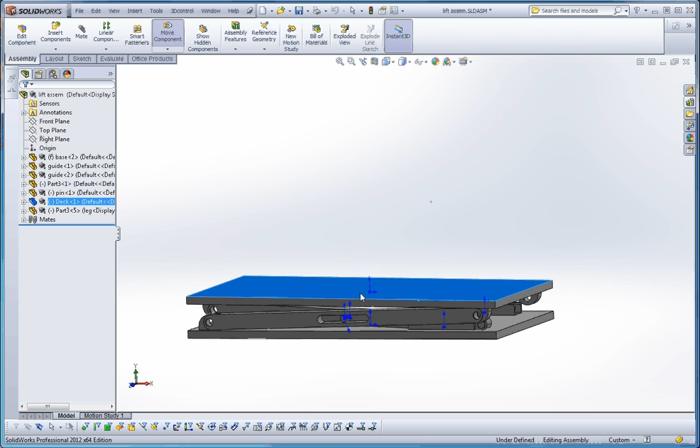One thing that's apparent about the assembly is that when you lift it up, it has a tendency to rotate. In fact, it really exaggerates that toward the end, so it isn't quite parallel. I believe the way you solve that is if you think about this as being mirrored both top and bottom, what you need down here is a slide as you have, a fixed rotation point over here, and a slide up here.

What you have is a slide right here, and I believe that slide needs to be on top, so whatever happens on the top happens on the bottom and vice versa. I think that will make things function a little bit better.

So let's do this. Let's start from the bottom of the bar, go to the top, and check our parts and see how they work.

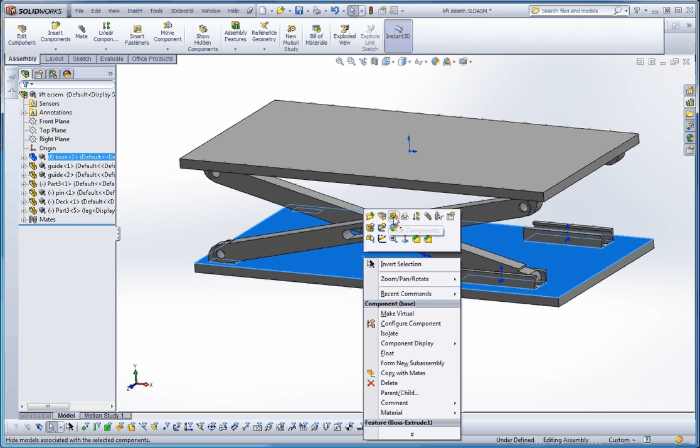What I like to do is open these up, and you can do this one of two ways. You can click on the part itself, right click, and go to your choices, but typically the most common choices are in the upper left-hand corner. You could open a part, edit the part in place into the assembly, hide components, change transparency, and so on. But what we're looking for is open part. We can do the same thing over here on the feature manager design tree—open up the part that way too.

So let's go ahead and look at the base. What I typically do is open these up, look at your sketches, and make sure your sketch is fully defined. You have one that's not fully defined down here, but just for fun, let's start with the top sketch and take a look at that. That looks like a really good start.

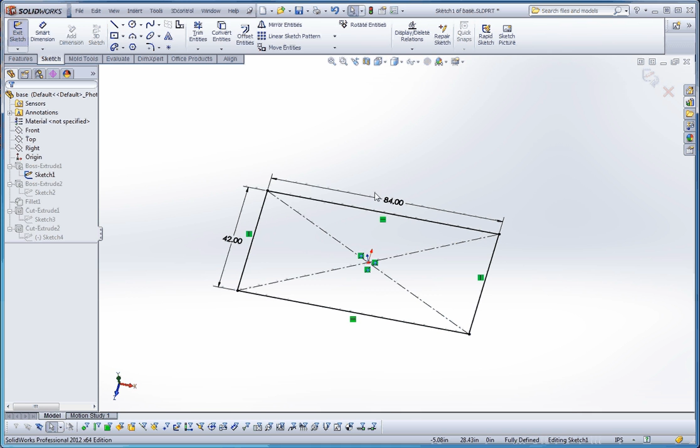When you're putting your sketches together like this, you also want to make sure you don't have any crowding issues, because when you insert these into a drawing format, the dimensions the way you have them right now is the way they're going to appear in the drawing. So you want to make sure they look good—you have good symmetry in there.

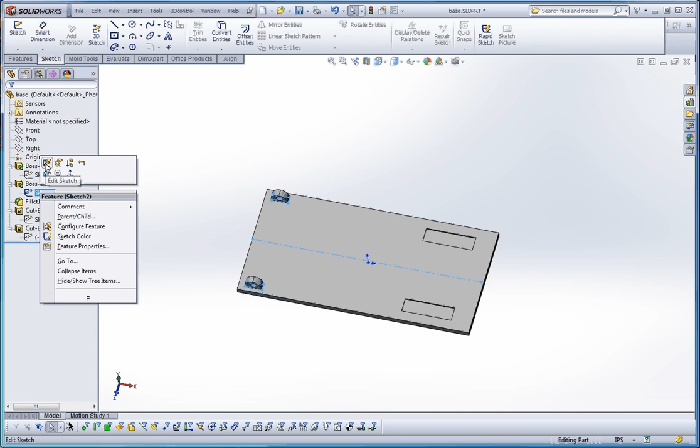You have the origin right in the middle of that, which is exactly where you want it to be. So now you have your planes in the middle of that too—your top plane is there, of course, but your front and right plane are also right down the middle, as you can see. This one looks good. What you do is fully define it on one side and just mirror it to the other side. That's perfect, exactly what you want.

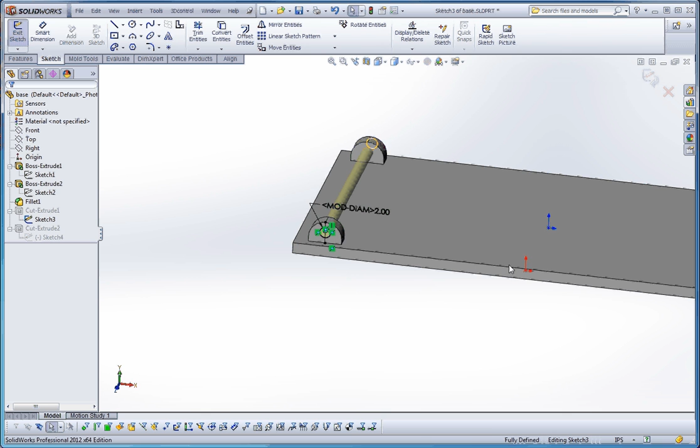Then you have your projected origin down here, turning blue. What I typically do when I go through sketches like this is look for blue elements—things that may not be fully defined. That also means your real origin is that way too, so that's your origin, that's where the origin really is. But the projected origin for your sketching is actually right there. So that looks like it's fully defined and in a good location.

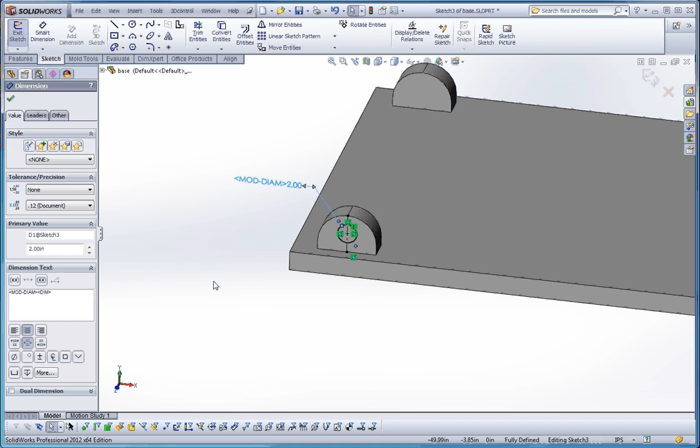For some reason, the text you have down here regarding the definition of your diameter is actually showing the text. Sometimes that happens when the capacity of your computer, like your memory, is getting really low, and it just pops up every now and then. If you were to redo that dimension, it might change it. So that looks pretty good.

And then this cut extrude down here—you don't necessarily have to, but it's good practice to go ahead and redefine these. You have some elements down here that aren't fully defined.

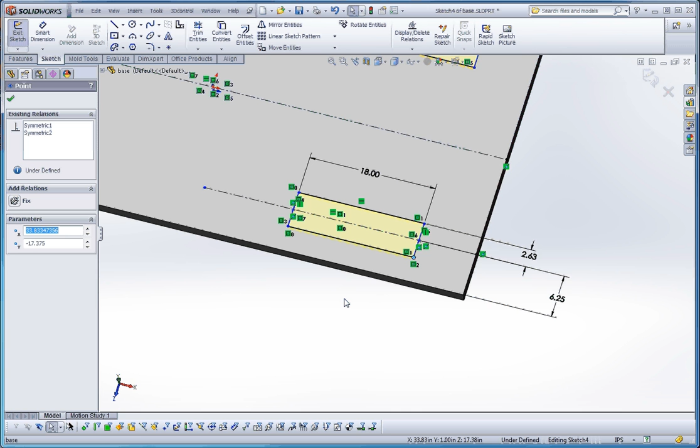So what we have down here is these lines aren't fully defined. The way you typically do this is grab some of the points and pull them back and forth. You can pull the line, but it's better to grab the points, because that will tell you more—whether this line and that line are not fully defined, and you can go ahead and define that. So it looks like what you need is a distance relationship here between that line and the edge. Let's go ahead and put that in.

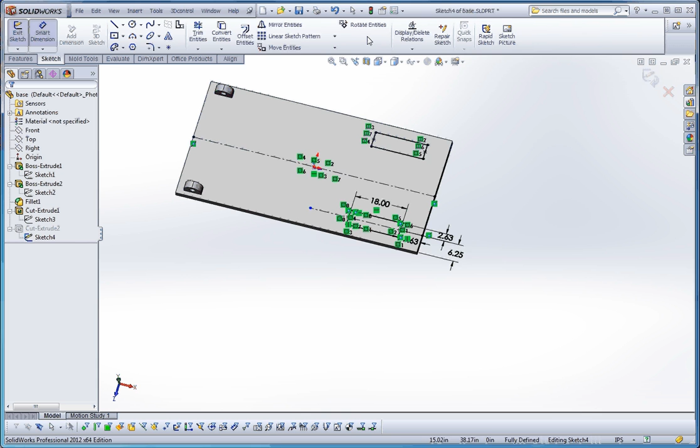7.625 perhaps. I'm not certain if that was the original placement of that. I thought it was 7.725, but let's go ahead and rebuild that, and now you can see your sketch is fully defined. So that's in pretty good shape.

I'm not going to save that, but I am going to keep the changes. So I didn't save it, didn't put it on my hard drive, but it will keep it in memory. And then now we're going to go ahead and take a look at the elements as they exist right now in your assembly. So let's go ahead and open up the next component that's going up.

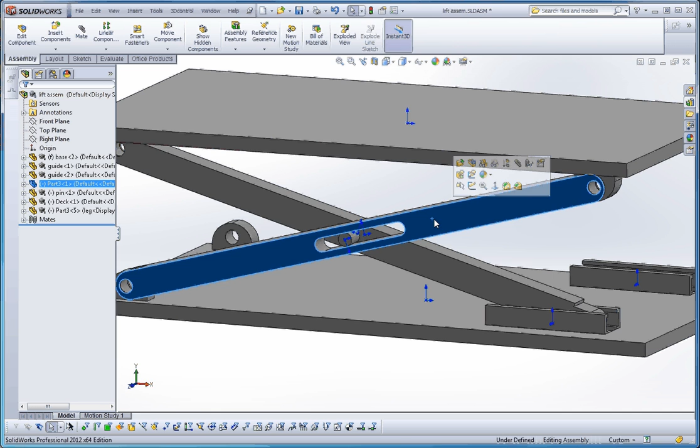Let's open up that. It looks like everything's fully defined, so that's in pretty good shape. It looks like you've done a lot of work here. And I also notice that you have some configurations in here too.

You have your default configuration, which you can keep. We can call this like maybe leg 1 or leg translation or whatever you want to do. And then you can have a leg 2 in there too. Think about the default configuration.

I usually have a default configuration in there that's got all the elements turned on, so you can see everything and how they relate to each other. But the way it is right now, it looks like it's in pretty good shape. So I like that. Looks like that's pretty good.

Let's go ahead and open these up, see if there's any sketches that need to be defined a little bit better. It looks like you have all these pretty well defined, so this is a very good model so far. And yeah, it's in pretty good shape.

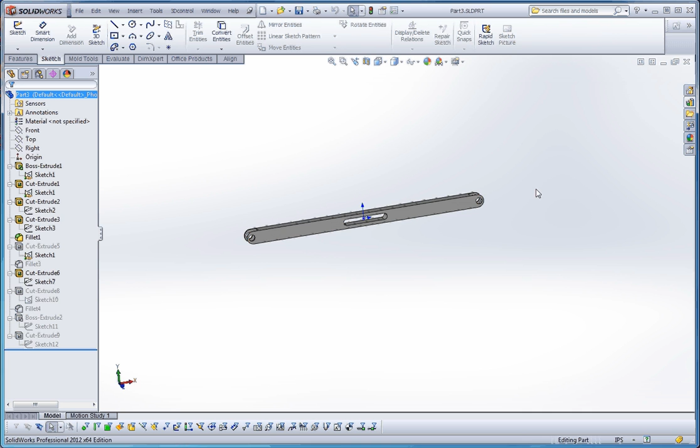So that leg and that leg we've covered. I don't think we've covered this, so let's go ahead and open up that and see what that looks like. You have a boss extrude, and that looks like it's underdefined.

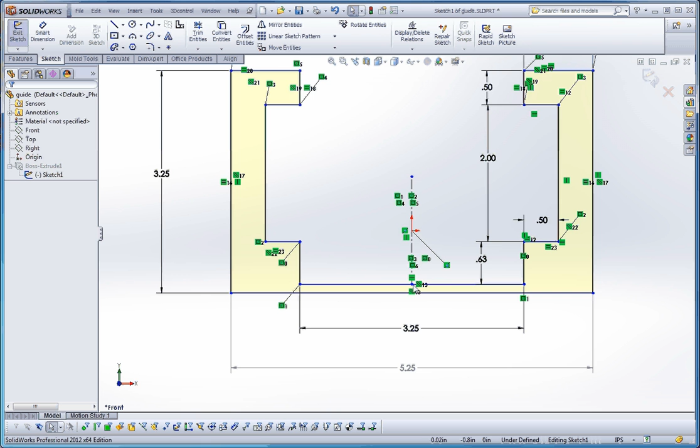And yeah, I'm going to make that normal too. I have a shortcut key for that. So it looks like your origin is out here, maybe in an arbitrary position here. Let's go ahead and put your origin in a different spot.

What I'm going to do is take your center line here and trim that a little bit. I'm also going to take the midpoint of this line and make that coincident with that center line. I did this because I want to make sure I put the origin down here on the bottom, so you have a midpoint down here. Let's go ahead and delete that midpoint sketch relation.

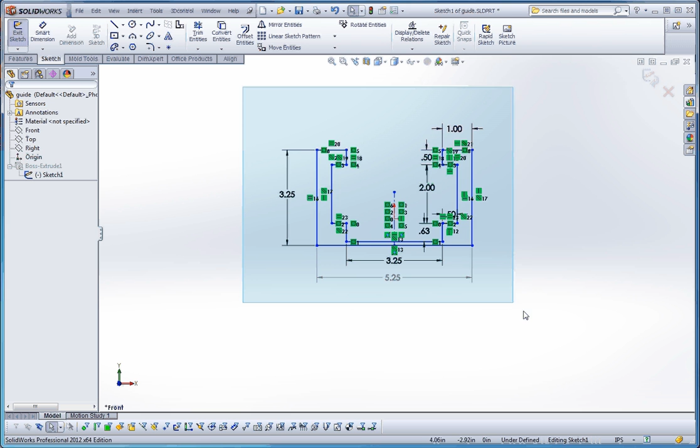And let's go ahead and grab everything and move that. So if you do a pickbox window around the whole thing, right click, go to move entities. Let's go ahead and pick this point here and move that up close to the origin. It's not going to give us that sketch relation up here.

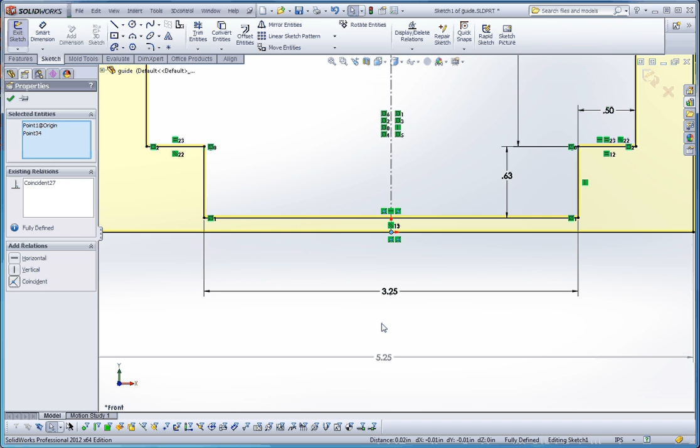So let's do this. Let's get it kind of close. And then after that, let's click on that and the origin to make those coincident with each other. And that should make it fully black. So everything's black, everything's fully defined.

We go ahead and rebuild that. The sketch is fully defined now. So it looks like we're in pretty good shape on that.

So let's go ahead and close that out. And I'm not going to save the changes, but again, I'm going to keep the changes in memory so that it updates our model, because I don't want to rewrite the files that you sent me.

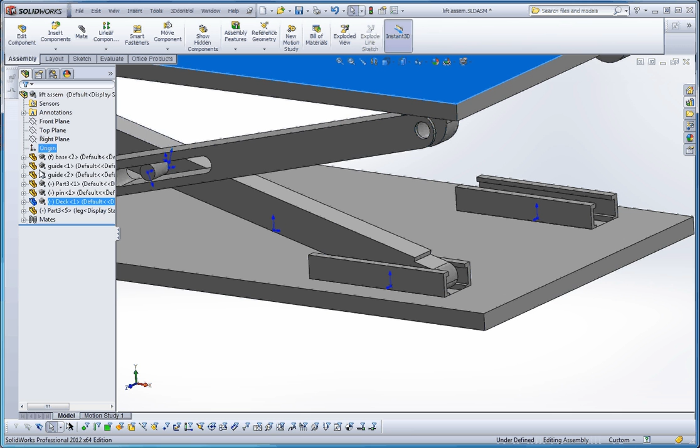So looks like everything's in pretty good shape. Let's go ahead and go through your mates and see what that looks like. You have a coincident mate down here, coincident mate on this side so that you line that up, and probably a third coincident mate in the back, which makes that fully defined in the assembly.

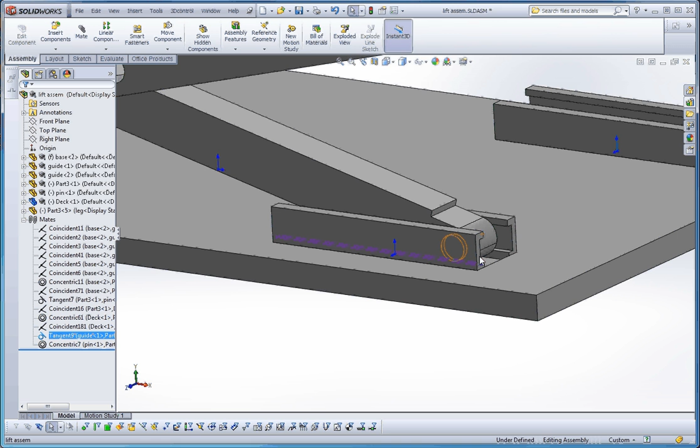It looks like we did the same thing on that side, so that's in pretty good shape. Concentric relationship there, coincident relationship, that lines that up. You have a tangent relationship here, that's okay. Coincident and concentric up there, coincident there, and tangent here, which is good, so that thing rolls along the bottom. And then you have a concentric up here, so that looks like it works.

So it looks like everything's in pretty good shape here. Your base on top, your deck, as you call it. Base would be the bottom, deck is on the top, and that's appropriately named. You could also have done this in configuration too.

You could have made the deck and the base the same file if you wanted to, and made a different configuration out of that. That's your option, you don't necessarily have to do that. But let's go back to our sketches here and see what that looks like.

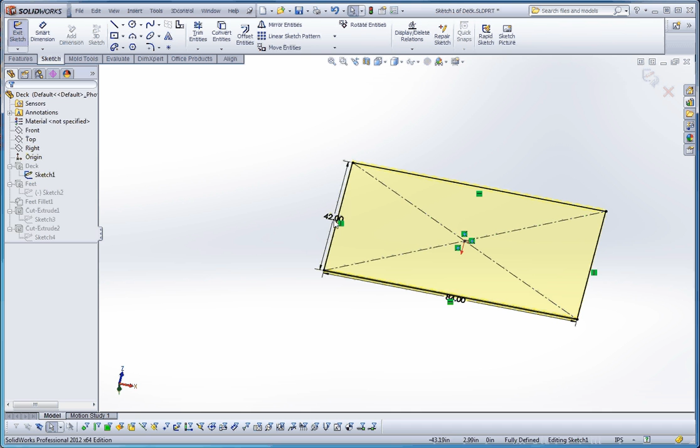The deck sketch here, which is the same dimensions as the base, that looks like it's in pretty good shape. The feet, that's not fully defined. The sketches for putting a hole in there is fully defined, and same with that side too, so that's in pretty good shape.

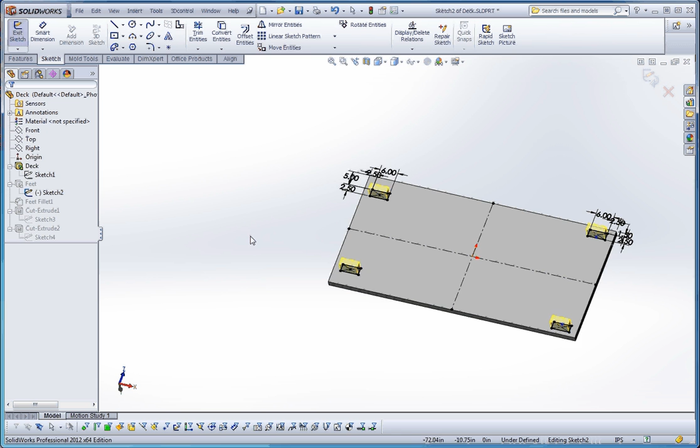One thing you can do about this too is you can mirror these elements on the other side, and I'll show you how to do that here in just a moment. But your feet, this is pretty good. Looks like it's not fully defined though.

And what I found in here were these wayward points. It looks like you had some points, maybe the points were in the middle, as they are in here, of your center rectangle that you made, and somehow they lost those relationships, but you don't really need them here, so let's go ahead and delete them.

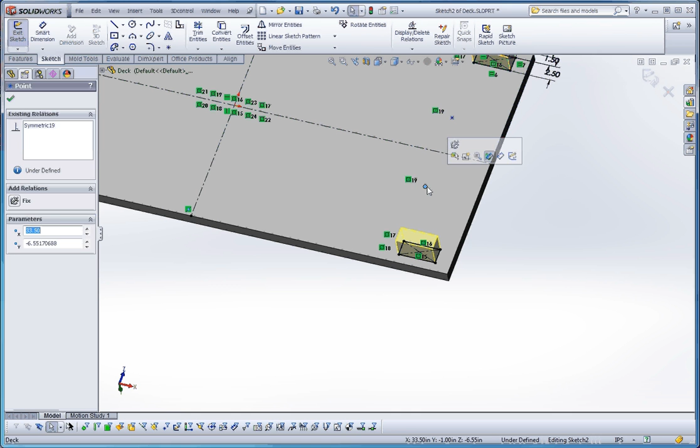And what I was looking for here is anything in blue. Anything in blue is probably going to be not fully defined. Something else you could do here too.

You went ahead and put in dimensions in here. As I mentioned before, when you put your dimensions in here, they are going to appear on a drawing. You don't necessarily want to have them appear twice. If these are symmetric with each other, you can go ahead and delete these relations or elements over here and just mirror everything.

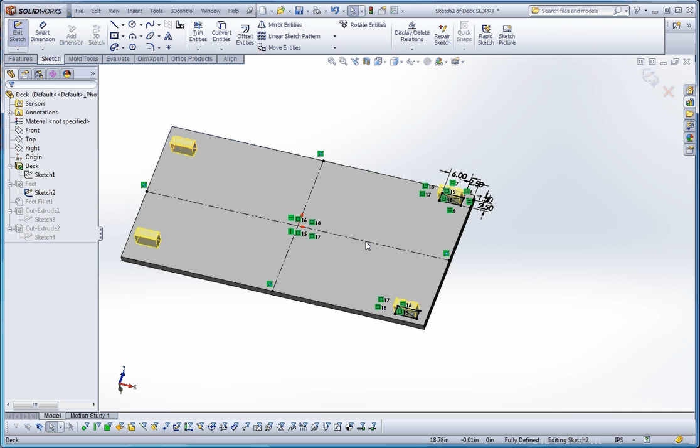So it looks like you initially mirrored these from this side to that side, which is good, using that center line as an element to mirror by. But let's do this. Let's go ahead and highlight these and go to the mirror command up here on your sketch tab on your command manager, and let's mirror about that.

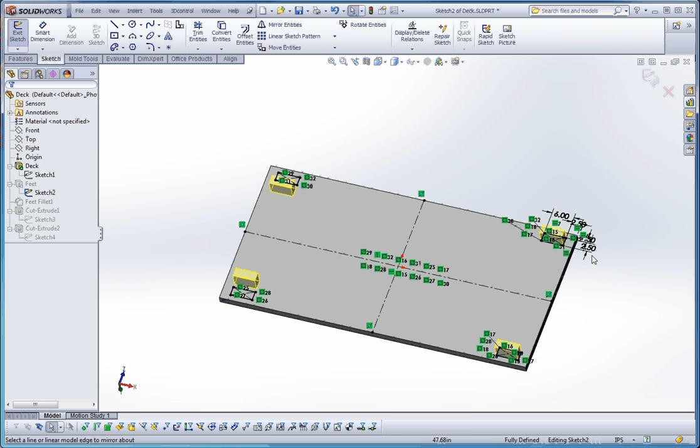So you should see them on this side over here. And if you do that, green check mark, now you have them over here. Now you have only one set of dimensions over here, mirrored to the bottom, and then these two elements mirrored over here. That should be in pretty good shape.

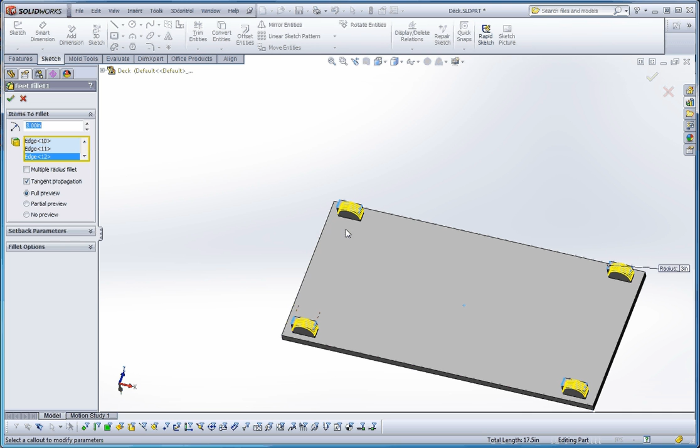Now that might cause other things to go out of reference here, but we can go ahead and fix that. So we have a missing edge over here, missing edge over here. What we want to do is put those edges in over here, and then add these edges over here, so we can redefine it. Just because there are now different features over here, it doesn't recognize what was there before.

So we have a couple missing edges over here. Let's go ahead and delete those because I think we've fully defined that. Now our orange or yellowish box turns blue. So I think we're in pretty good shape there.

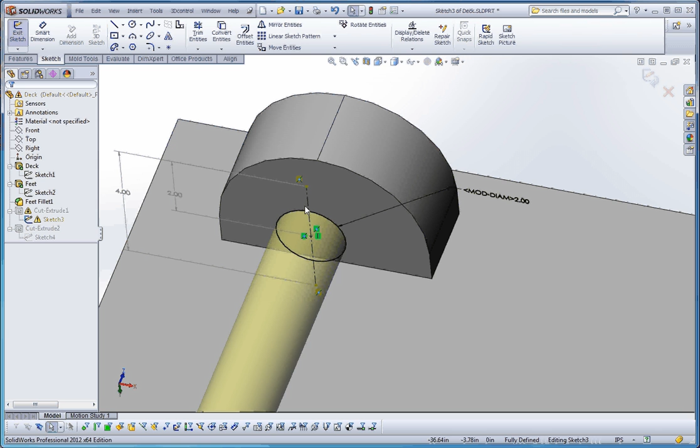The sketch is out of context over here, so let's go ahead and fix that. You have a sketch relation over here that's no longer valid. A couple things we can do. We can grab that endpoint since it turns red and try to align that up here. So we have that in good shape.

This one down here, when it turns red, we can go ahead and drag it and bring that over here. So that looks like it fully defined it. Let's go ahead and rebuild that.

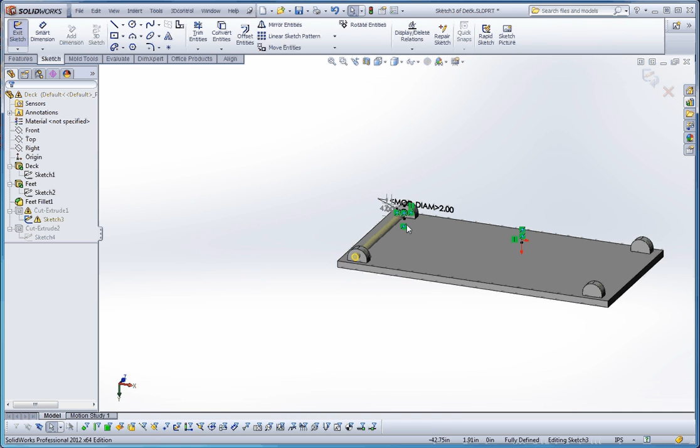It looks like we have some other elements in here too that are a little bit out of context. I think it's probably thinking about the plane that it should be drawn on. So if you right click on Sketch 3, go to Edit Sketch Plane, yeah, now that's missing a face. So I'm not certain what face you started on. I think it might have been this face perhaps, or maybe that face. Let's go ahead and try that and see if that works.

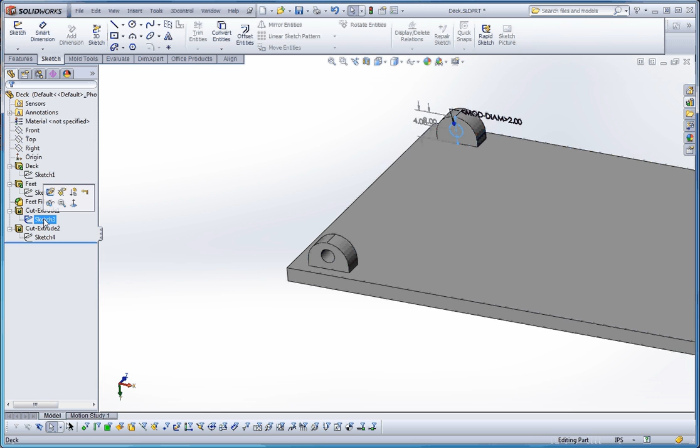If I didn't get the right face, and maybe it was on the other side, we can go ahead and redo that. Let's go ahead and choose this face. And then green check mark. Now it goes all the way through and that's in pretty good shape.

So everything else falls into line. Let's go ahead and rebuild that. Let's go ahead and close it. No, we're not going to save it, but yes, we want to keep it in memory. So that updates our model.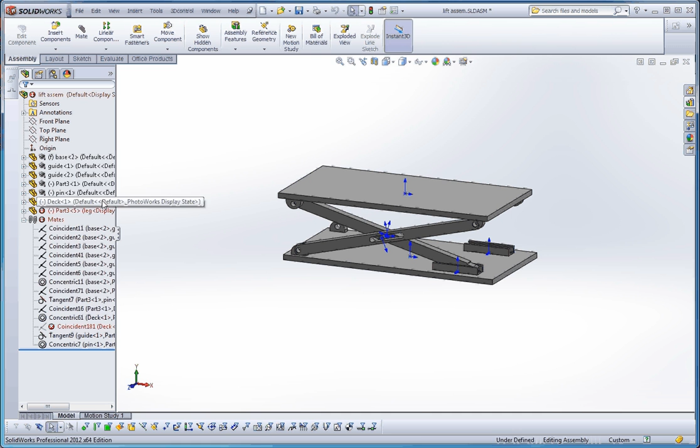And now we're in pretty good shape. So, you know, that caused some errors in here too. So let's go ahead and correct that. The coincident relationship in here, since that's a different feature in here, let's go ahead and redefine that.

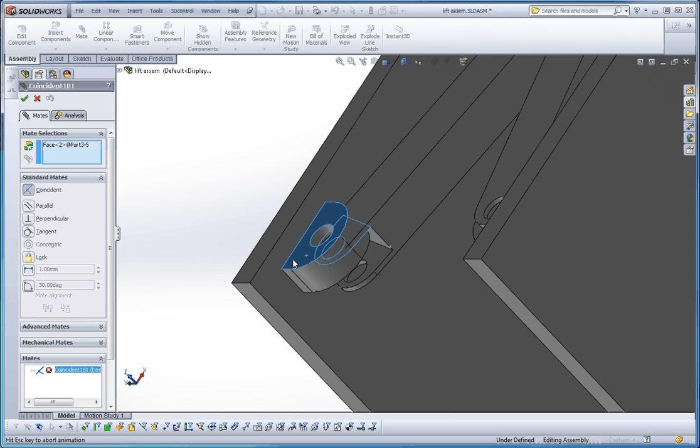So let's click on that. We're missing a face over here. And I think what it's looking for is this face here. So let's go ahead and click on that. Green check mark. And let's go ahead and rebuild. And that looks like the only error.

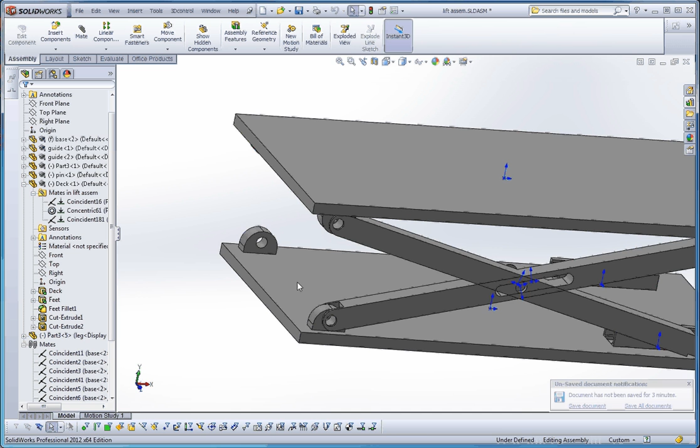So remember, when you redefine things in a sketch environment, it gives you a new feature. The new feature, if you go into the assembly environment, that feature also needs to be redefined for the faces and other things that might be in there that might need to be redefined there, if that makes sense.

So yes, I would redefine this so that it's— oops, looks like we're not quite in good shape there in the bottom. So we'll have to redefine some of these edges over here, but I'm not going to do that. Be careful when you do make redefinitions in here, and maybe that, you know, having those redundant dimensions in there on that one part, the deck part—you can probably keep that, and that's okay.

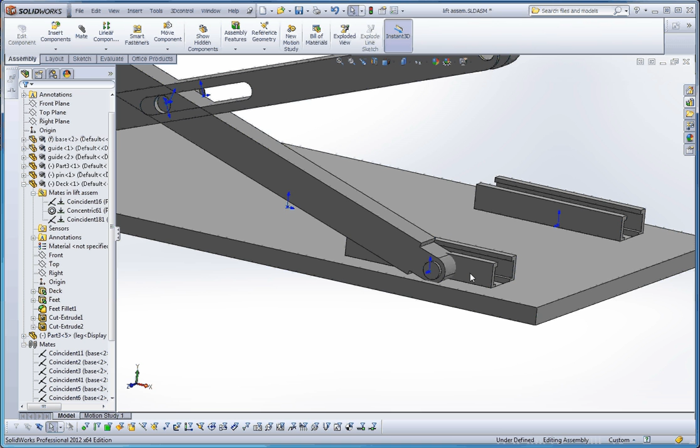But keep that in mind as you're doing your modeling, that you want to make sure you reduce the amount of dimensions down as much as you can, so you don't have those things imported into your drawing. But other than that, your model is in pretty good shape.

The mechanics of it, let's go ahead and redefine that so that you have a fixed, concentric and coincident relationship over here, and you want to make sure it slides translationally on the bottom of your deck as it does down here.